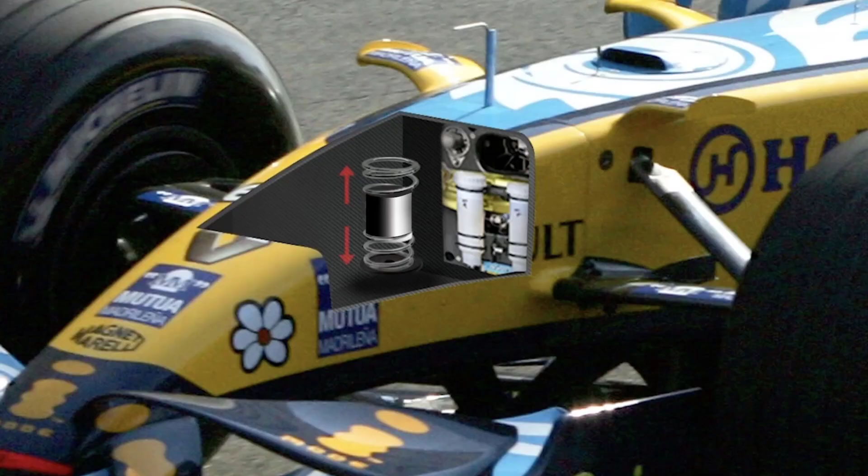It's the year 2006. During this year there were a lot of controversies in F1, and one which created the most fuss was about the Renault mass damper. What is a mass damper and how does it work?

A tuned mass damper, also known as an active mass damper (AMD) or harmonic absorber, is a device mounted in structures to prevent discomfort, damage or outright structural failure by vibration. They are most frequently used in power transmission, automobiles, and buildings. Tuned mass dampers stabilize against violent motion caused by harmonic vibration. The presence of a tuned damper allows the inertia of a great mass to be balanced by a comparatively lightweight structural component, such as a heavy concrete block placed so that it moves in one direction as the building moves in the other, damping the structure's oscillation.

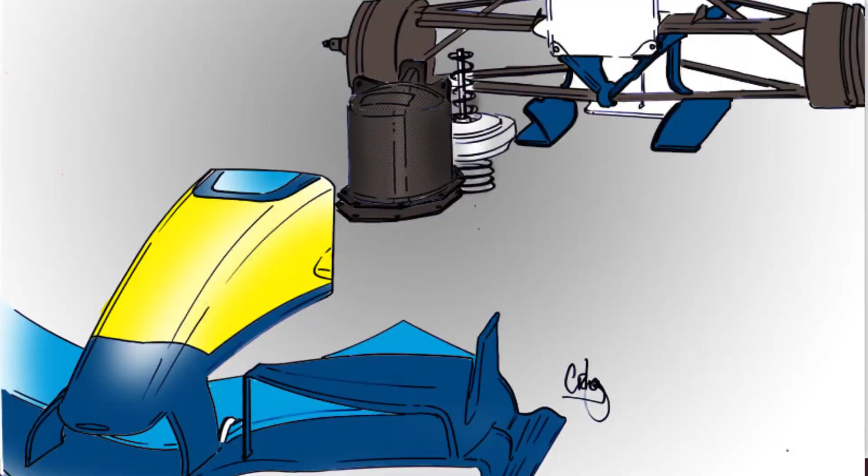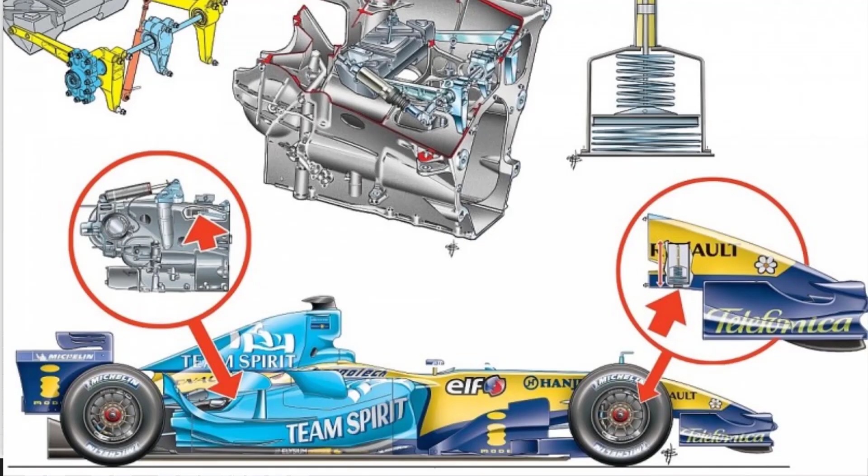In F1, this technology was first used by the Renault F1 team, a French-based squad, in the 2005 Italian Grand Prix, and it raced relatively unnoticed. So how does it work in the Renault F1 car? It was invented by Renault engineer Rob Marshall and consists of a mass, usually around 9 kilograms, suspended between two springs. It sits inside the nose of the car, out of plain sight. Inside the cylinder was a disc sandwiched between two coil springs, and the unit was filled with damper oil.

The car body might be kept reasonably stable, but the downforce it produces has to act through the 4 tire contact patches. Always changing ride height, because of road irregularities, dive and squat, causes always changing levels of downforce, and because of that, level of grip. This makes the car harder to drive and slightly slower than it would otherwise be.

The mass damper is a device designed to even out those fluctuations and to stabilize ride height and downforce. This maintains front-end ride height and level of grip by pulling the nose down every time it passes over a curb or a bump in a corner. Because of that, the Renault R26 uses the tire contact patch much better, and it also benefits on the aero side as the front end of the car is less pitching and more stable.

Unfortunately, over the winter break a few engineers left Renault and took the technology to other teams. Rob Marshall, the inventor, for example, went to Red Bull, where the system was applied to the RB2.

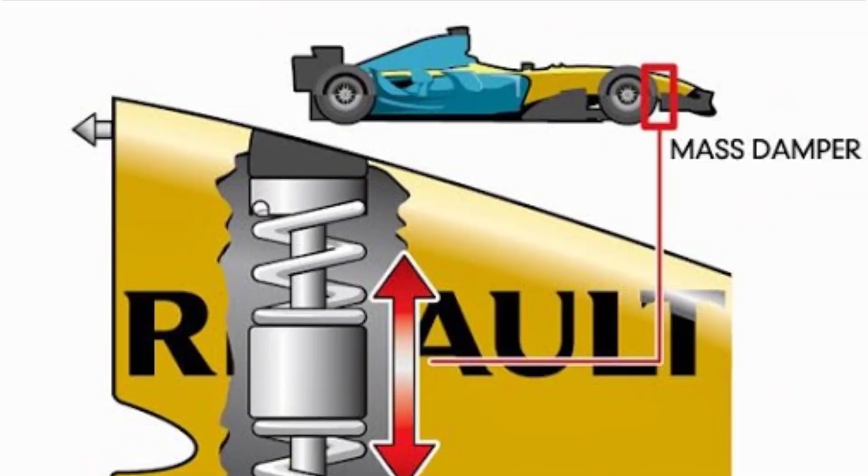After the French Grand Prix 2006, the sport's governing body decided it was illegal and ordered all teams which used it to remove it from their cars. It was McLaren who started to point the finger at this problem, as they had tried such a system in two tests but could not make it work properly. In 2006, Ferrari, Red Bull, Toro Rosso and Midland MF1 all followed the same path, while Honda and McLaren were still only testing it. Renault and Ferrari then transferred the principle to the rear of the car as well.

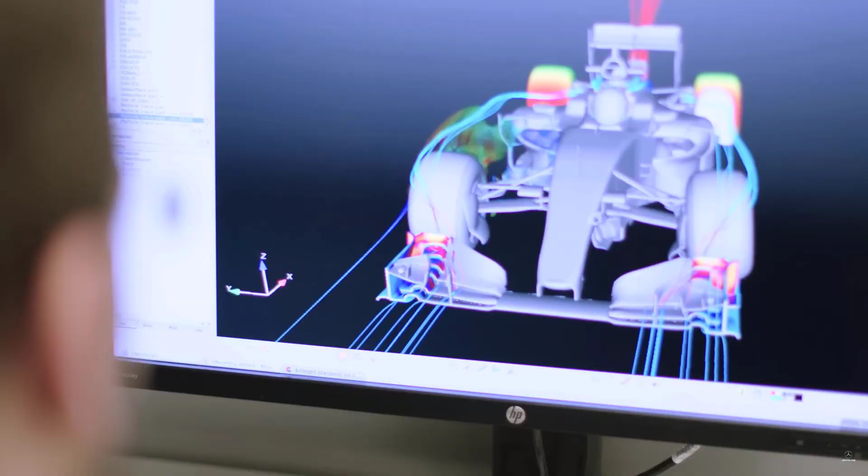At Hockenheim, Honda wanted to run a system with one mass damper in the nose and another in the tank area, but 13 days prior to the race the FIA banned the concept, arguing that it was a movable aerodynamic device. This action was a bit strange, because the FIA could have been aware of this argument already the season before, and at the start of the 2006 season, when they allowed various teams to use it.

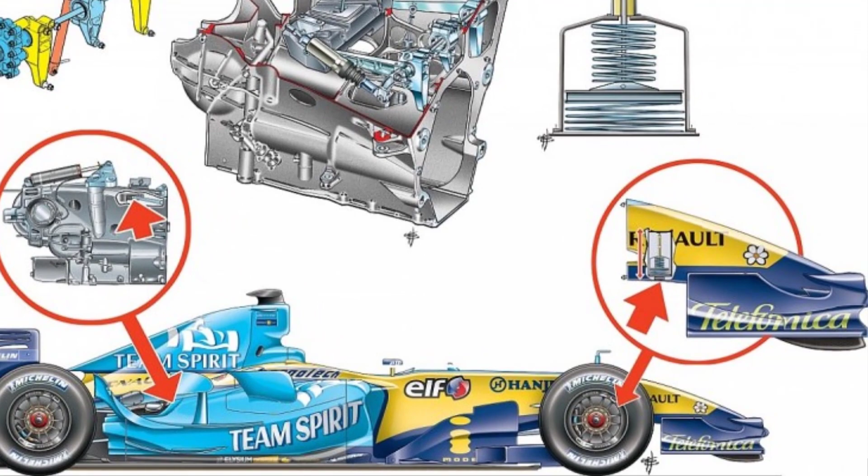They were afraid that other teams would develop these concepts into something extreme. One team, for example, was asking whether they could try a 30 kilogram mass damper oscillating not only vertically but also horizontally and diagonally. For those who were able to set the system up the right way, it was an advantage.